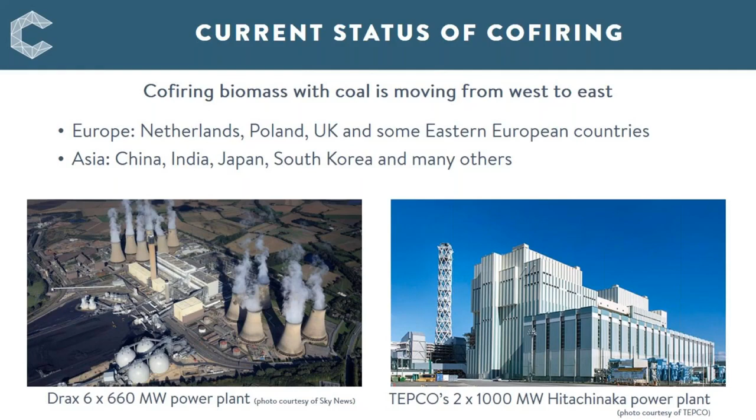Meanwhile, co-firing in Asia is expanding fast. At IEACCC, we have studied co-firing for many years and published reports on various aspects of this subject. My study is an update of the previous report.

The major types of biomass fuels for co-firing with coal are wood, grass, and straw-based. Imported wood pellets are the main biomass co-fired in Europe. In Denmark, a large amount of local straw has been used. Japan and South Korea mainly co-fire imported wood pellets, although Japan also co-fires waste wood. In China and India, agriculture waste is the main fuel. This is a win-win as it reduces local pollution from burning crop residues as well as reducing CO2 emissions from coal-fired power plants.

This figure shows heating values and steam temperature of various biomass. We can see agriculture residues have low steam temperature and heating value, hence it is more challenging for co-firing. Also, wood chips and pellets, especially pre-treated ones, have similar characteristics and are more uniform than crop residues, therefore have less impact on the power plant.

For residues like straw, deposition and corrosion issues are more of a problem, so specific strategies are needed for high ratio co-firing. For example, IFK at University of Stuttgart recommended a straw share of less than 25% for minimum impact on the boiler. They also suggested using an online probe for monitoring conditions in the boiler.

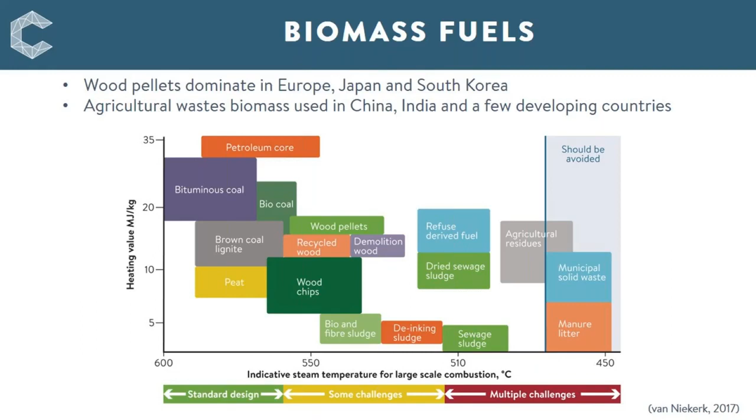Much effort has gone into developing efficient and cost-effective biomass pretreatment technologies to improve the physical and chemical properties and the energy density of biomass.

Common pretreatment technologies include washing and leaching, steam explosion, torrefaction, wet torrefaction, and densification. Leaching or washing the biomass with rainwater, tap water, or acidic or alkaline solutions is an effective way to remove troublesome elements. Bioleaching has attracted attention recently. Laboratory results show it is more efficient than water for removing most contaminants except sodium.

Steam explosion has been widely used in the production of bioethanol. It is now being used to pretreat biomass for power generation. Pellets from steam explosion are easier to mill in large coal mills, which minimizes retrofitting cost at a coal-fired power plant. Research has also been carried out on various feedstocks such as rice straw, corn stover, or coffee husks. Valmet took the steam explosion technology to the pilot scale with its BioTrac system, as shown in the photo on the right.

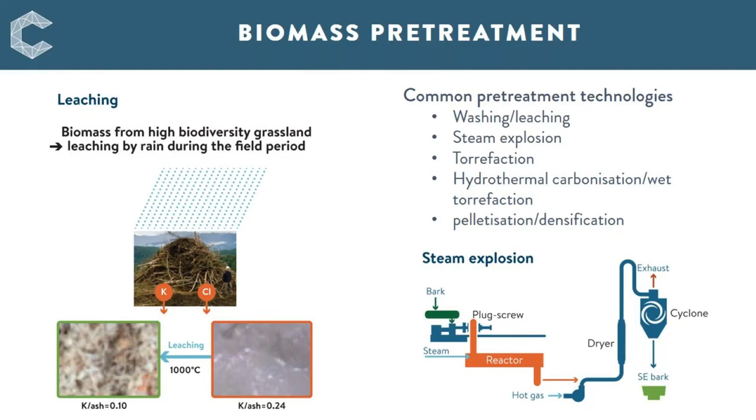Torrefaction is currently the most active area in biomass pretreatment. It is a popular research topic in the last 2 decades. The figure here shows that torrefied biomass has many improved properties compared to raw biomass.

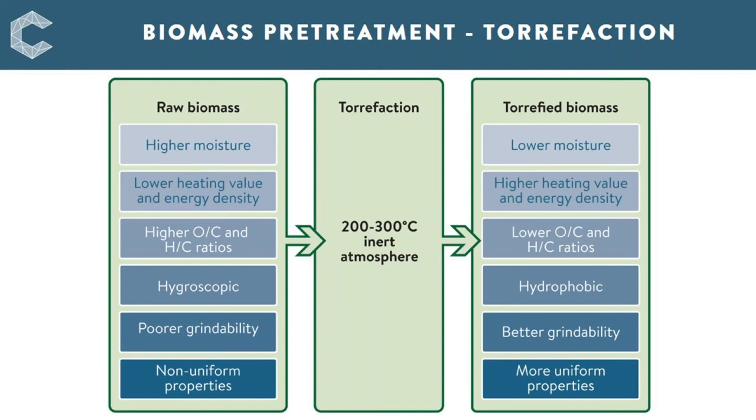Several companies are trying to commercialize torrefaction technology. The initiation of commercializing took off in 2010 to 2011, and quite a few plants were planned. There were 65 companies working on biomass torrefaction globally in 2017, and many of these are still in operation. Even so, the deployment of torrefaction technology has not been fulfilled as fast as originally expected. Steady industrial production and commercial status have not yet been established, although torrefied biomass is widely available in the market.

Many reactor concepts have been considered for biomass torrefaction. Here's a collection of torrefaction reactors available in the commercial market, which have been deployed at torrefaction plants.

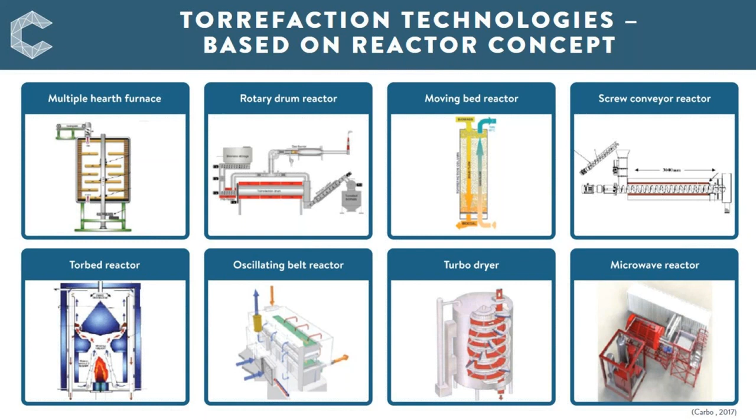To maximize the benefit of biomass pretreatment, two or more technologies are often combined. For example, ECN in the Netherlands has developed and patented TORWASH, which combines washing and torrefaction to improve low-grade biomass feedstock.

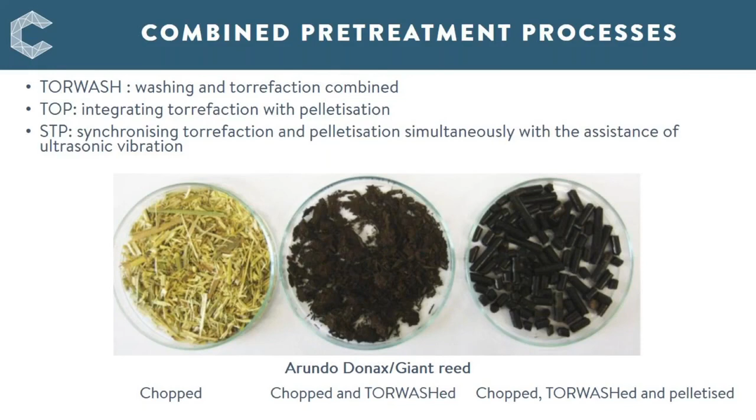Torrefaction can be integrated with pelletization, referred to as TOP.

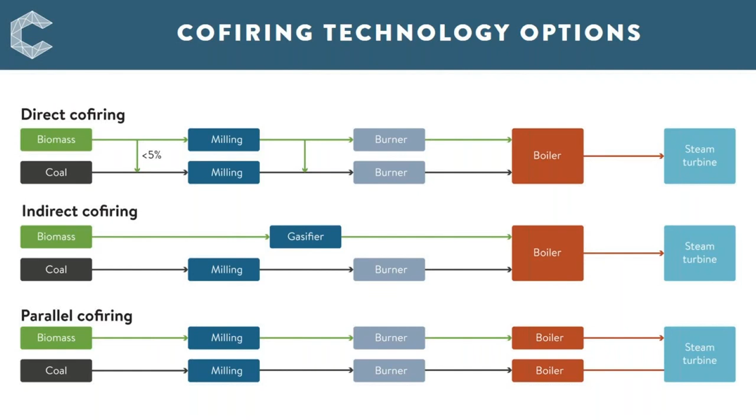Now we move on to co-combusting biomass and coal. Co-firing technologies are commonly classified into three types: direct co-firing, indirect co-firing, and parallel co-firing, as illustrated here.

Fluidized bed boilers are most suitable for co-firing. Existing coal-fired FBCs can be easily adapted to co-firing. In general, FBC boilers can substitute a higher level of coal with biomass and handle biomass with higher moisture content and larger particle size than PC boilers.

They can achieve high efficiency, typically over 90%, even with challenging low-grade fuels. FBC co-firing can reduce the amount of ash discharge and limestone consumption. One problem with FBC, though, is the increased likelihood of bed agglomeration occurring.

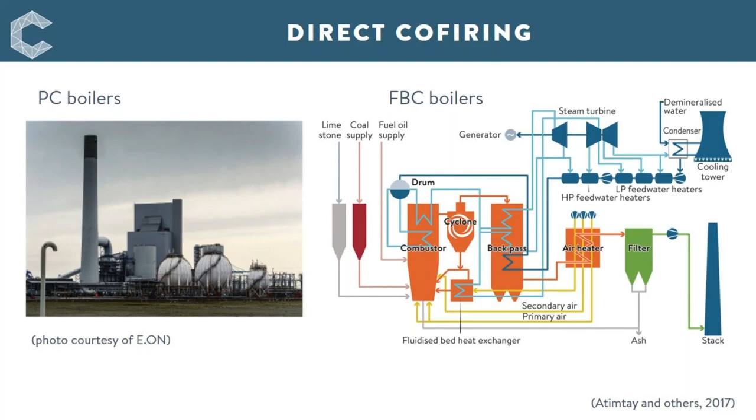The commonly known indirect co-firing technology is coupling a biomass gasifier with a coal boiler. There are many advantages to this setup, but it has not been widely adopted in Europe, largely due to the expense.

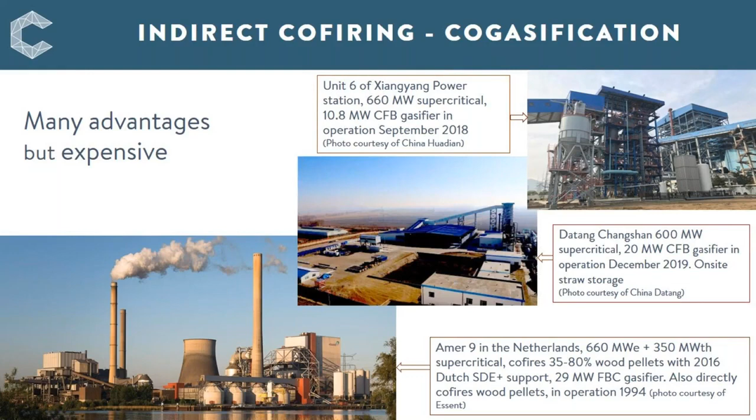Optimizing the ratio of biomass to coal for co-firing has always been a goal. Drax in the UK tried various co-firing ratios before converting its unit to 100% biomass. Amer 9 co-fired 50% wood pellets last year and plans to move to 80% this year.

In the test launched in January 2018 at the Soma Energy Park power plant, a ratio of 34% at rated load and 50% at partial load were achieved.

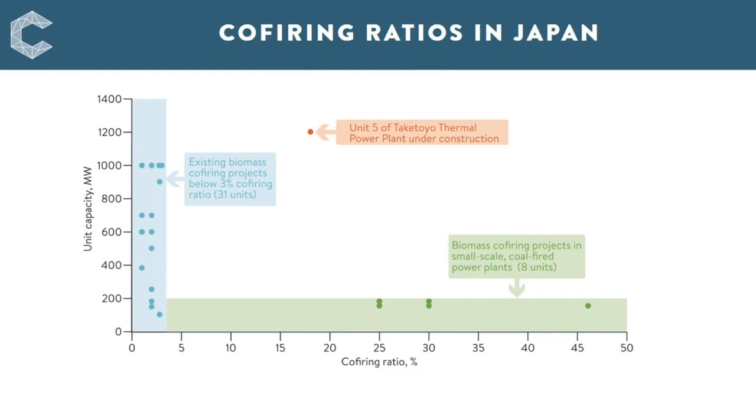The European Commission's BiOxySorb project published a report in 2018. This demonstration program included oxyfuel co-firing research at the lab and pilot scale at the IFK at the University of Stuttgart. Large-scale tests were carried out in a 20 megawatt facility by CIUDEN in Spain. A first guideline in Europe was developed for biomass coal combustion under oxyfuel conditions. Concerns about retrofitting, such as biomass coal milling, are also discussed.

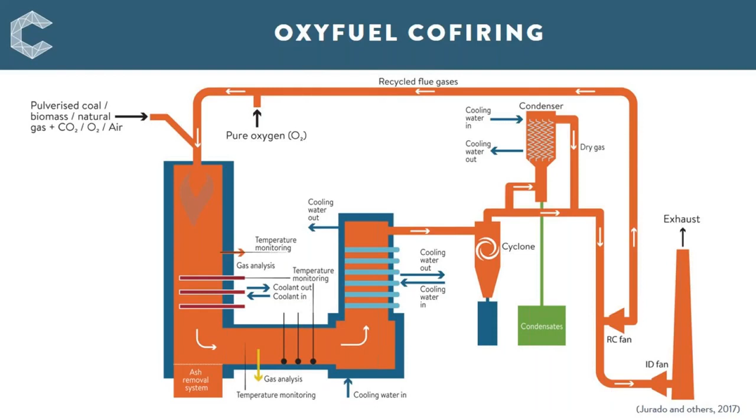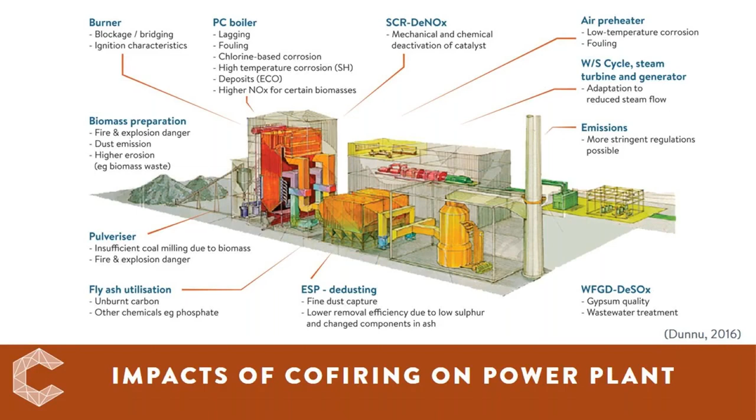Despite pretreatment of biomass and whatever combustion method and biomass ratios are used, co-firing biomass has impacts on coal-fired power plants, on the combustion, operating logistics, and environmental control systems, as summarized in this slide.

I'll start from operating issues. There are three different routes for milling: they can be co-milled, or milled separately and combined at the burner, or even milled separately and burned separately. When milling for co-firing, especially in the co-milling route, biomass ratio must be considered, generally up to 20% of biomass. Fuel grindability, mass balance, and heat balance also need to be considered.

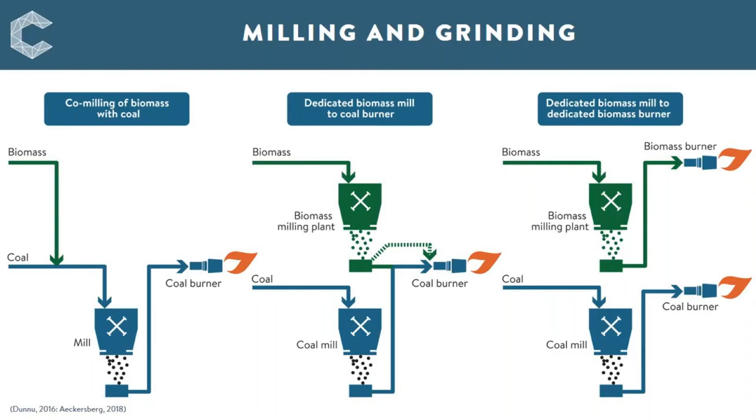Loesche Energy Systems Limited is the market leader in design and supply of mills. Their key product is a vertical roller mill. The burners may require modification.

This example is Unit 3 of the Studstrup CHP plant. The coal mill and burner were modified in 2017 to prevent load decreasing. Additional flame scanners were installed to solve the flame detection problem. Minor changes were made to the existing ignition system to enable continuous operation at low load. The oil igniter has been replaced by a plasma burner. Oil nozzles have been replaced by smaller ones.

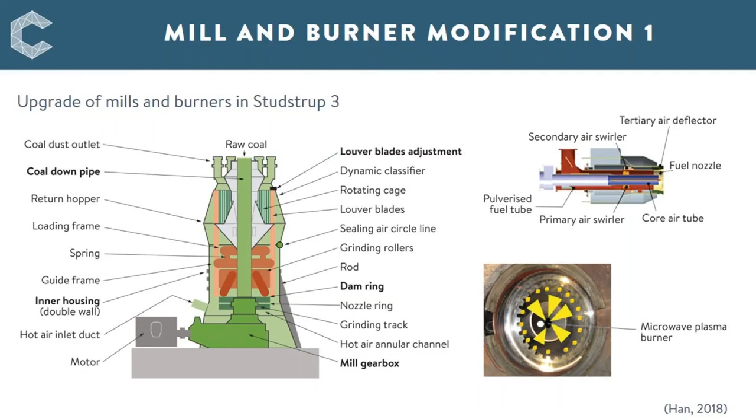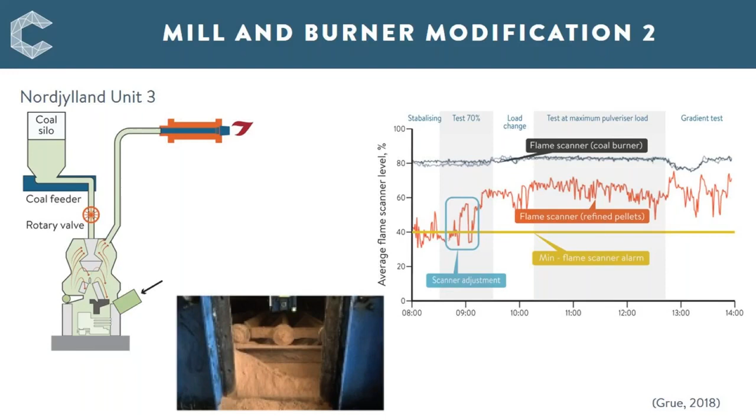Another example is Unit 3 of the USC Nordjylland plant. The issue here was that coal forms an airtight seal in the silo, but processed pellets don't, so dust can flow from the pulverizer to the feeder and eventually block it. To prevent this, a rotary valve has been installed. A biomass flame is slightly different from a coal flame; adjustment of the flame scanner was sufficient to ensure safe operation of the pulverizer.

These models are available for air and oxyfuel conditions. The recent trend is modeling oxyfuel co-firing and CFB modeling in 3D.

State-of-art CFD-based models can solve the complex interdependent processes like fluid flow, turbulence, heat transfer, and heterogeneous and homogeneous chemical reactions involved in coal combustion. However, the complete description of particle trajectory, chemistry of devolatilization, char oxidation, and volatile combustion is still mainly based on simple models.

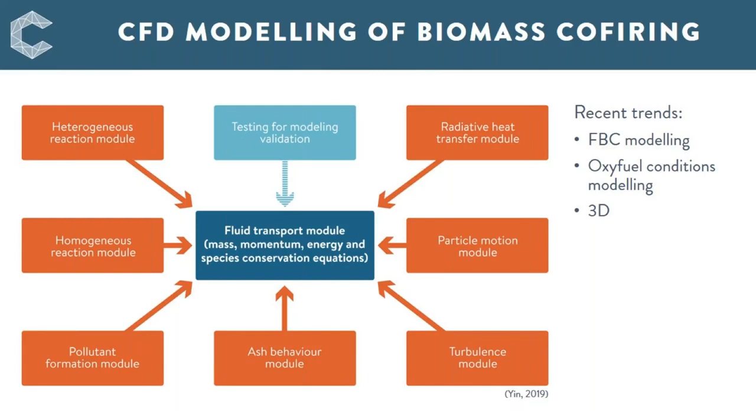These compounds are more concentrated in agriculture waste than wood pellets. The deposit leads to slagging in combustors, fouling of heat transfer surfaces, and bed agglomeration in fluidized-bed combustors. Ash deposition is also affected by physical properties. To reduce slagging and fouling, as mentioned earlier, CFD modeling can help understanding of ash deposition.

Alkali carbonates can be used as a sorbent to reduce hydrogen chloride. Combustion additives such as kaolin can be used to change the ash composition and further reduce the presence of volatile alkali species. Fortunately, the potassium chloride and sulfate components of biomass are mainly water soluble.

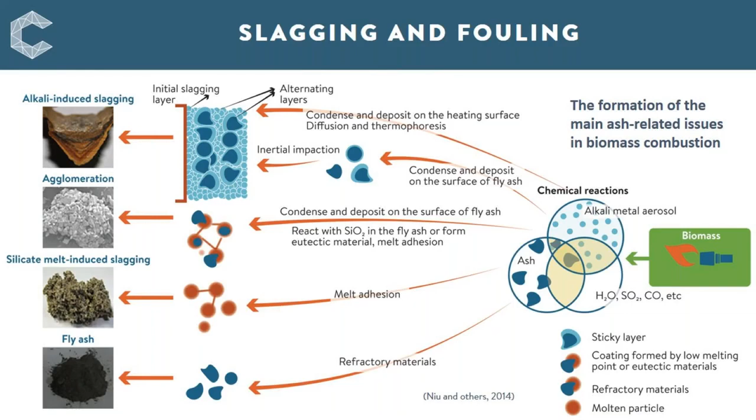Washing and leaching with tap water can reduce them directly. Thermal pretreatment such as torrefaction has also proved effective. Co-firing herbaceous biomass with low fouling tendency coal such as lignite reduces slagging in PC boilers and slagging and bed agglomeration in FBC boilers. Fouling can be controlled by the use of online cleaning systems.

Some biomass, such as agriculture waste, have high alkali and/or chlorine content, or both. Co-firing them, particularly straw or switchgrass, can exhibit a corrosion problem. Chlorine in combustion gases, especially at high temperatures, can accelerate the corrosion of combustion systems and the flue gas cleaning systems.

The same corrosion prevention methods used in boilers can be used elsewhere, such as modification of the reheater and superheater, in order to allow larger spacing, more soot blowing, and lowering the live steam temperature to below 500 degrees, and so on. Other ways to minimize corrosion include the use of more

corrosion-resistant alloyed materials such as Sanicro 25 and 28. Chromium-based or nickel-based diffusion coating can be applied for protection.

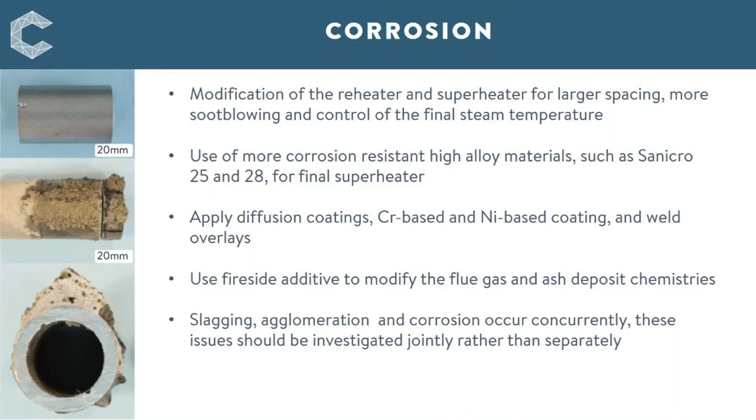The risk of fire and explosion is an important issue for biomass co-firing. Biomass has a low ignition temperature and high reactivity, making it harder to handle than coal. Torrefied wood is more brittle than untreated biomass, giving it a greater chance of exploding.

The factors affecting explosion include particle fineness, high reactivity of dust materials, high concentration of dust in air, low ignition temperature of dust particles, proximity to a high energy ignition source, and a favorable oxidizing environment.

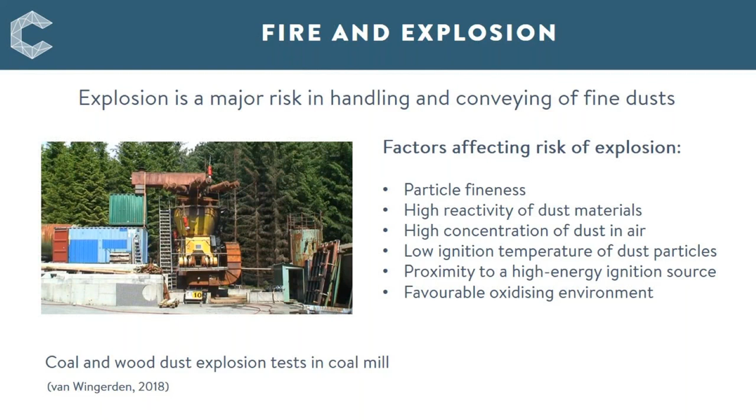This is a short video showing the explosion test conducted by GexCon.

Apart from CO2 reduction, co-firing can bring positive emission reduction from a coal-fired power plant. Most biomass fuels have a lower ash content than coal, so in general, co-firing reduces the total amount of fly ash produced. But in some cases, an increase or no change in the amount of PM has been measured. The effect depends on the type of biomass and the performance of PM collection equipment.

Fly ash particles from biomass combustion tend to be significantly smaller than coal fly ash. The capture efficiency of ESPs tends to decrease with an increasing co-firing ratio. With co-firing biomass, SO2 emissions invariably decrease, often in proportion to the amount of biomass co-fired. NOx emissions are harder to predict and vary with the biomass used and the manner in which the nitrogen is released.

However, there's evidence that co-firing can deactivate SCR catalysts. This is due to alkali constituents in biomass poisoning the vanadium-based catalyst in SCR systems.

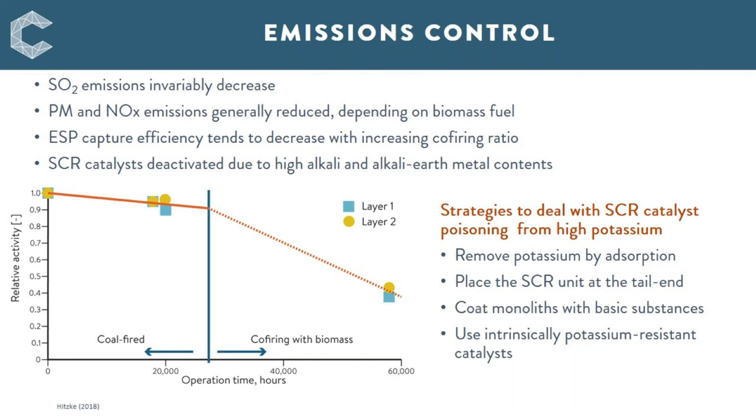Some strategies have been established to reduce poisoning of the catalyst. As mentioned, there's an overall reduction in fly ash production from co-firing power plants compared to coal plants. The ash contents from different biomass and coal differ in composition. This creates a burden for utilizing the fly ash from co-firing, especially at high co-firing ratios.

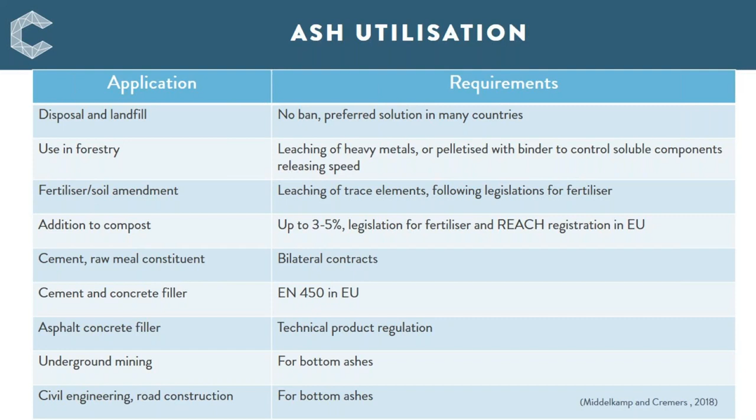On a worldwide level, no or a limited number of guidelines with best practice have been developed in ash management. This table lists biomass ash applications and requirements based on a survey conducted by IEA Task 32.

To summarize, co-firing biomass has been practiced in Europe for more than 20 years. Some of the technologies are commercially mature. Agriculture waste is more commonly used in Asia, which reduces local air pollution. But high alkali content can cause more issues with slagging, fouling, and corrosion. Methods to prevent and reduce these drawbacks are being developed.

Biomass pretreatment is often used. Some pretreatment technologies are in or close to commercial operation but can be expensive. Overall energy efficiency should be considered when choosing a pretreatment method. Biomass handling requires care due to the risk of fire and explosion.

Direct co-firing of biomass in large PC coal-fired power plants is still the most popular choice, although FBC boilers are more suitable for co-firing. Co-gasification co-firing is the main method in China. Oxyfuel co-firing with biomass has the potential to reduce CO2 emissions dramatically. Progress continues to be made to facilitate co-firing biomass with coal, but it comes at a cost, hence it requires governmental support.

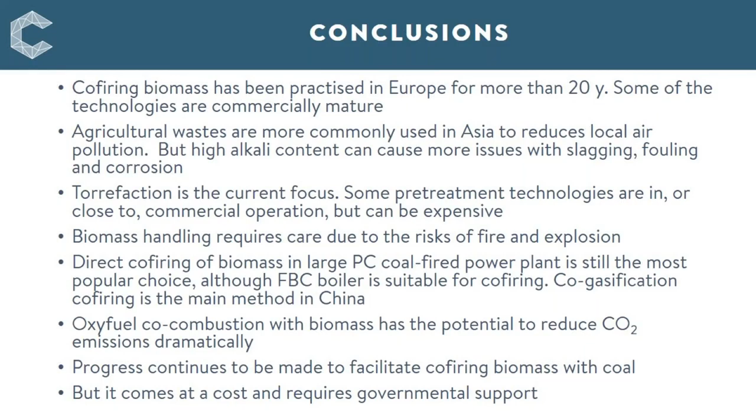The first one is from Hugh Lee. What checks can be done, and are being done, to ensure that particularly biomass is carbon neutral?

This question is actually related to biomass sustainability. Our center has done a report especially on this topic, and a webinar was also done on this topic. But my understanding is, when we utilize biomass - apart from agriculture and forestry waste - when they use wood pellets, they ensure it comes from the source. Sustainability has been enforced; my understanding is there are guidelines and perhaps even law established in this area. But to fully understand this question, I would like to refer you to our report, which I believe was published last year.